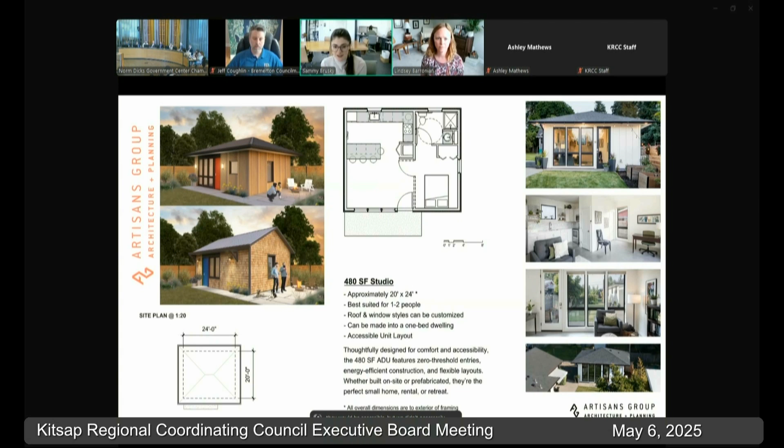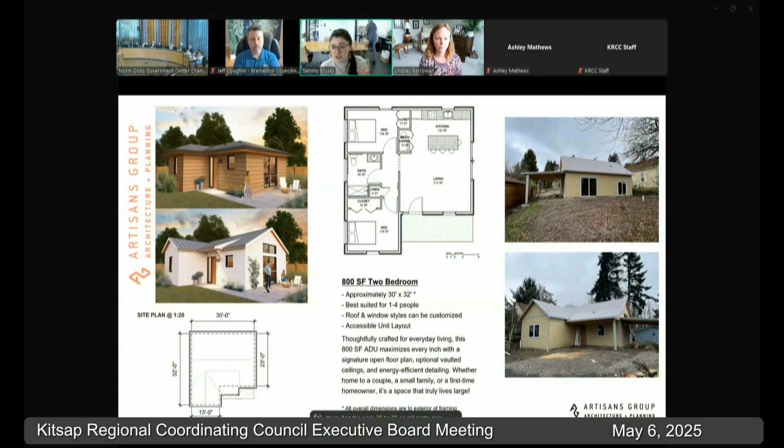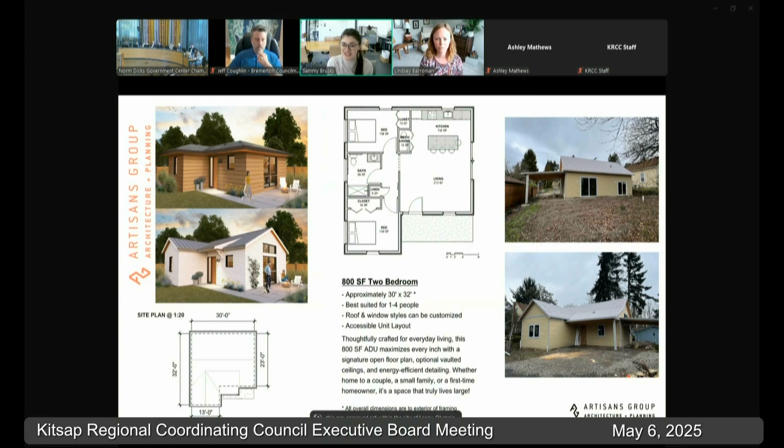This is the 800 square foot 2-bedroom. This accommodates 2 bedrooms for maybe a small family, or again it could be a mother-in-law or father-in-law suite off the back of an existing home that extends the property. This one is very compact as well, with a roof and window style that can be customizable, and it's also very accessible. This one is often popular with people who are wanting to age in place or have their parents age in place with them. On the right side there's a real built version of that — it was pre-painted, we'll get pretty pictures soon, but it's nearing completion. That was for a neighbor of one of our bosses whose house burned down, unfortunately. Having this pre-approved set within the city of Lacey, Olympia, and Tumwater allowed them to get into a new house right away, which was a really exciting way that this was able to be used in tragedy. That was awesome to see.

And then lastly, of our original plan sets, we've got the 800 square foot 2-bedroom, 2-story. This one is perfect for those really tiny lots where you've only got a small footprint, because it's only 19 feet by 24 feet. So this one's a really efficient design as well.

This one doesn't have as much roof flexibility, but we've built in other flexibilities instead. You can kind of see in the plans the little offset pieces - that's to show you that you can have an optional powder room, or you could do mechanical laundry underneath the stairs, utilizing every square inch. There's also an optional laundry room, say you put in the powder room, you need somewhere to put the laundry, so we've located that as well. So there's some flexibility with how people might use the space in this one.

And that is the original 4 plan sets. As you can see on basically every slide, there's pictures on the right side showing a built version, and it's exciting to see these popping up all over the place near us. Next slide, please. Although before I keep barreling through this, were there any questions on the original 4 plan sets for clarifications?

Any questions? Yeah. Well, thanks, Arlene. You calling me? No, this is fantastic, so great to see.

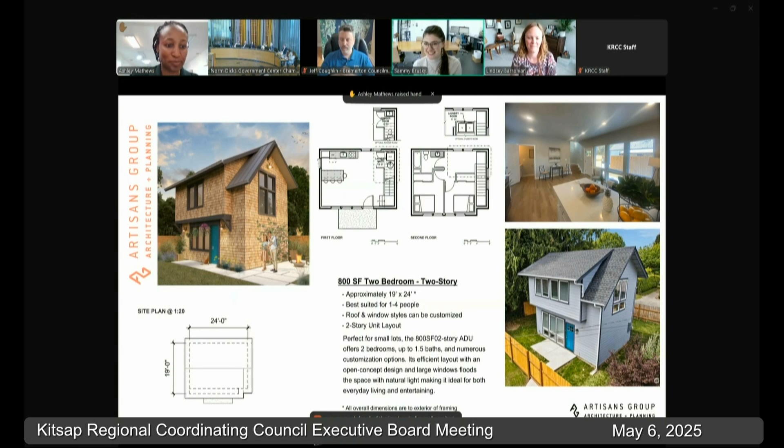Awesome. Well, I'm going to move on to the next slide then, and we'll also have Q&A time afterwards, but we're going to kind of be talking about the 2 new plan sets pretty soon here, and I didn't want to get too far away from the original.

As far as site plans, this was mentioned by Kiz, I believe, how this is part of it is not fast tracked. We've actually given an example site plan as a part of our promotional materials just to give people a broad idea of what might show up on a site plan and what might be required, but that's not something that we would do unless we were hired to do so.

So they're welcome to provide this as an example, but we won't be doing that. There'll be more client provided, or if the contractor wants to do that as a part of their contract, that's between the owner and the contractor. So next slide, please.

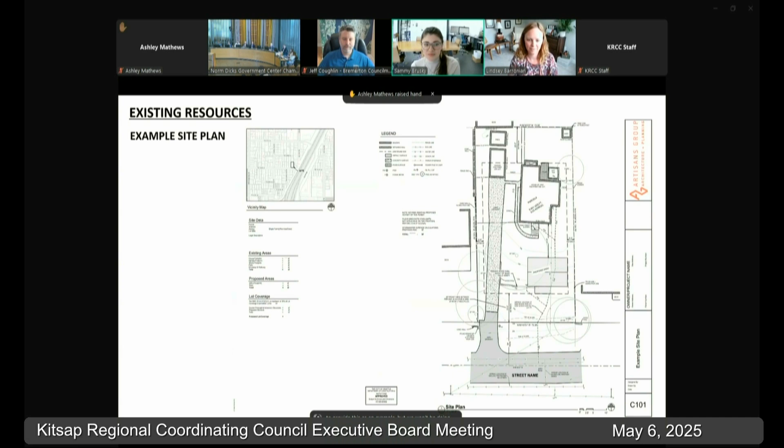All right, so I'll take this away. We developed a couple - you can go ahead and go to the next slide. We developed several different plan sets that were options for the KBA, Kitsap Builders Association council, and kind of presented them as, hey, what works best for you guys? And so we developed a two-car garage with a carriage house above, with the option to have a third car and an additional bedroom above, as kind of one of our main options.

And then the other option that we developed is a 1,000 square foot plan, because that's kind of really starting to be asked for a lot, with the allowance to go up a little bit higher in square footage. We developed two different options in that regard, one as a 3-bedroom option and one as a 2-bedroom option, and presented those both to the council. And I think if you go to the next slide.

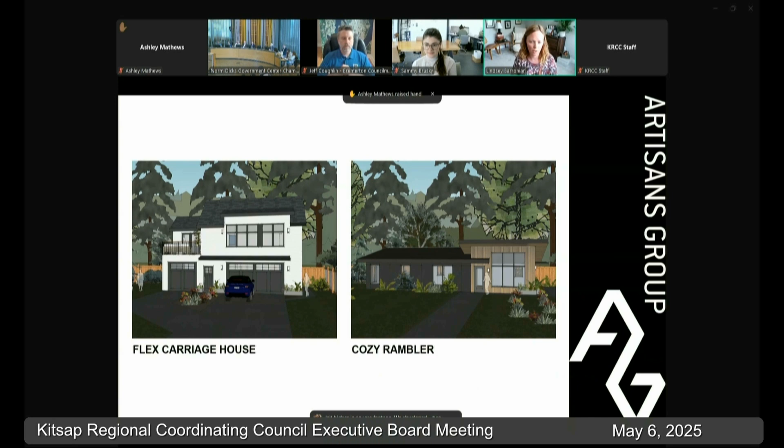So this is the two different options that we presented on the 1,000 square foot option. They are both a 20 by 50 footprint. A couple of the ways we are planning for alternatives is we are planning for an entry both on the long face of the building or the short face of the building, so that the building can be oriented in different ways on the site, giving options and alternatives.

The overwhelming advice from the Kitsap Builders Association was that they preferred the 3-bedroom, 1.5 bath option, and so that's the option we are proceeding forward with. It's that top option up there. It has a large, open kitchen and living and dining area with a galley kitchen.

And then a powder bath that has a washer, dryer, and water heater within it, and then a full bathroom off closer to the rest of the bedrooms. 2 full-size bedrooms, and then a smaller, nursery-style bedroom or den, kind of an office, multi-purpose space.

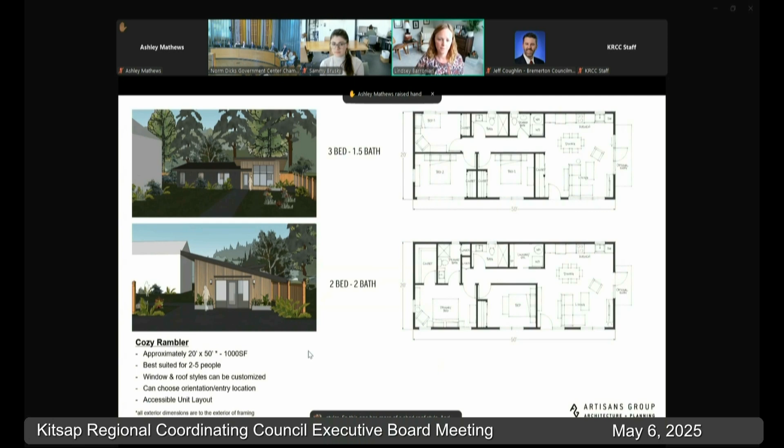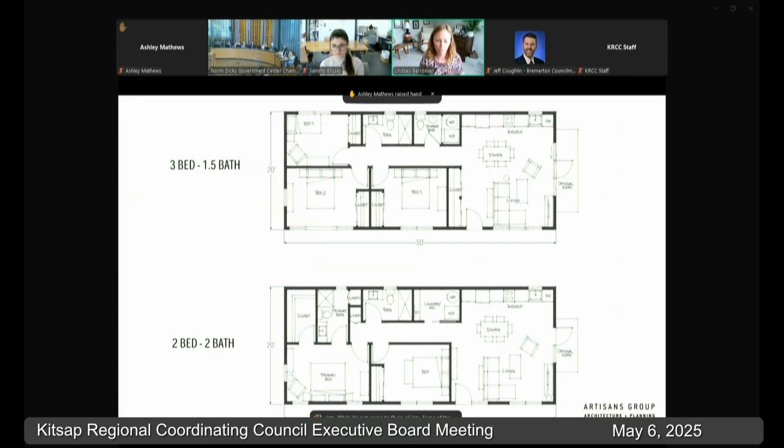That's those options, just a little bit larger. One of the things we talked through with the Kitsap Builders Association also was the size of these, and whether or not we wanted to increase the dimensions, the 20 by 50, in any regard. The advice we got was that this is a relatively flexible size that can fit on most lots. While it's not going to fit on all lots, some of the other plan options could potentially fit on a smaller, more constrained lot. So the advice was to continue with this plan, these dimensions, because they'll work on most lots within the county.

All right, this is the flexible carriage house. Like Sammy said on the other 2-story option, we're not doing a lot of different roof styles on this one. The big option here is that we're adding an additional garage stall and bedroom, office, and deck above. So the first option is a 24 by 28 foot layout, and then that second option grows it to 40 by 24.

We played with this in a bunch of different ways. One of the main things we came away from this was giving the owners flexibility to both be able to rent out the upper unit potentially, and also still be able to have the garage if they want to keep that garage for themselves. So by putting the stairs in the middle of the plan, they can keep the two stall garage for themselves and rent that additional stall along with the upstairs, so that the upstairs unit can have a garage to themselves.

So that gives flexibility, and they could flip it either way. They could also rent out the two car garage and keep one stall for themselves. So by splitting those up instead of having just one really large garage, it gives more flexibility to rent out different portions of the unit.

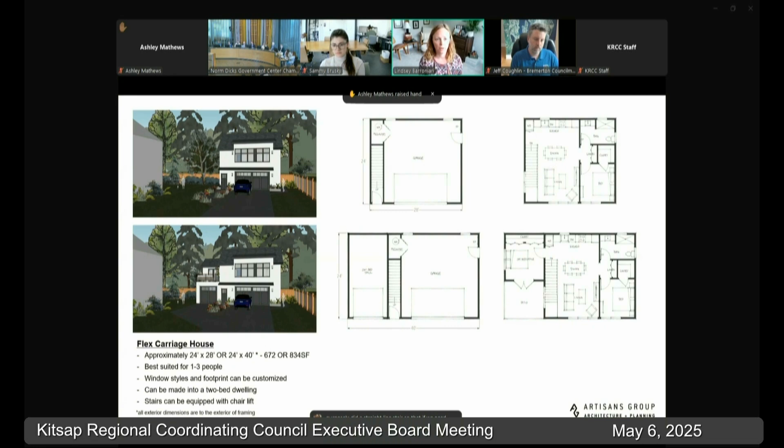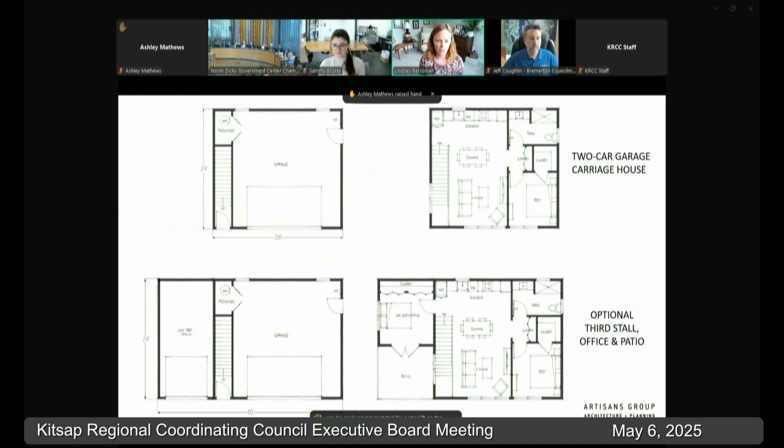If you go to the next slide, it gets these bigger, so you can see a little bit more detail. I think one more slide. That is it for our presentation.